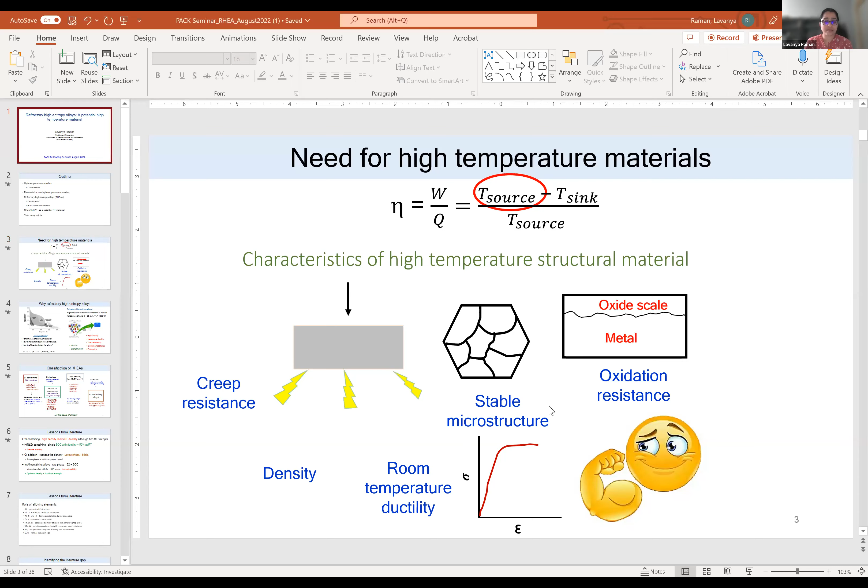Thank you. Yeah, sorry about that. Is someone else in the room with their audio on with you? No, I think now it's fine, right? Yeah. Yep, so it's good now. Yeah, so thank you so much for introducing me. So most of you know me, the work that I have done. So yeah, I'll start sharing my screen. I hope now the slides are in the presentation mode and it's visible.

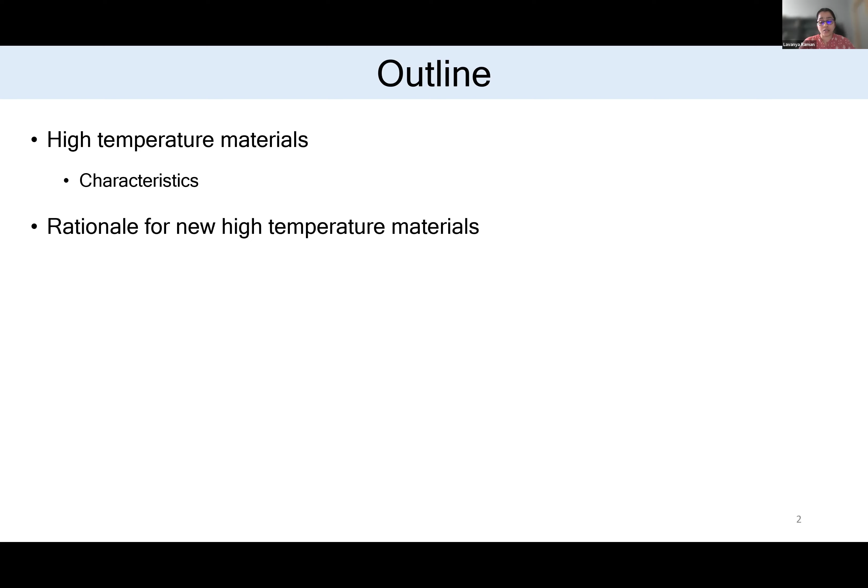Okay. Yeah, so good morning and thank you everyone for taking time to attend this talk. So the title of today's talk is refractory high entropy alloys, which can be a potential high temperature material. So the outline of the talk goes like this. I've planned what we mean by high temperature materials, what are their characteristics, why we need or how we can come up with new materials, why at all these refractory HEAs and how we can classify them, and what is the role of the alloying elements which will help us in developing a good refractory alloy which will meet the application requirements.

And finally, the main part will focus on the work which has been done extensively on this composition, which is chromium, molybdenum, niobium, titanium, tungsten in equiatomic proportion. We'll see how we made this alloy from different routes, stage by stage. What is the microstructure? Is it really thermally stable, and the deformation behavior? So finally, some learnings that we have from the work which has been done and how we can extend or go ahead.

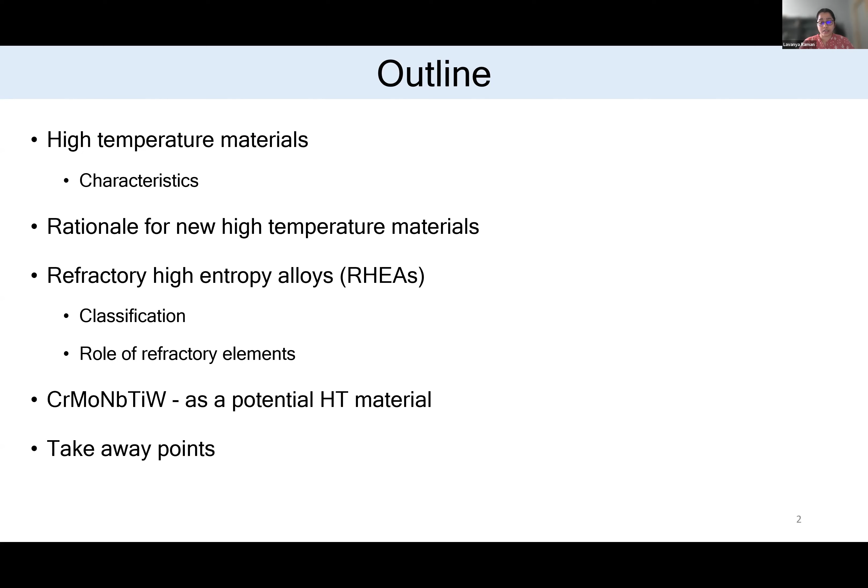So coming to the high temperature materials, all of us know that the efficiency of any working system can be improved when the material can operate at a higher temperature. So this is the famous equation. When the operating temperature of a material is higher, the efficiency can be increased. So when we say the material has to operate at very high temperature, it has to have a very high melting point and it should have certain characteristics. So we will see what will make a material qualified as a high temperature structural material.

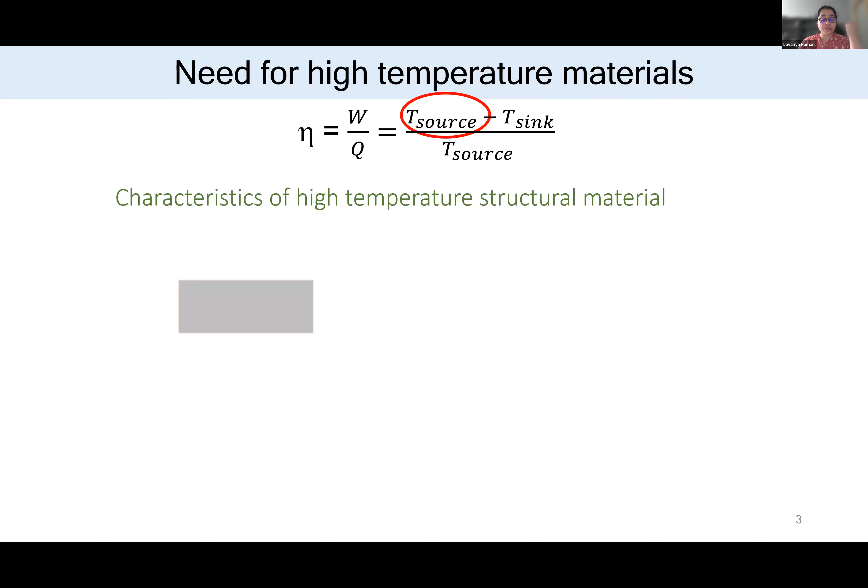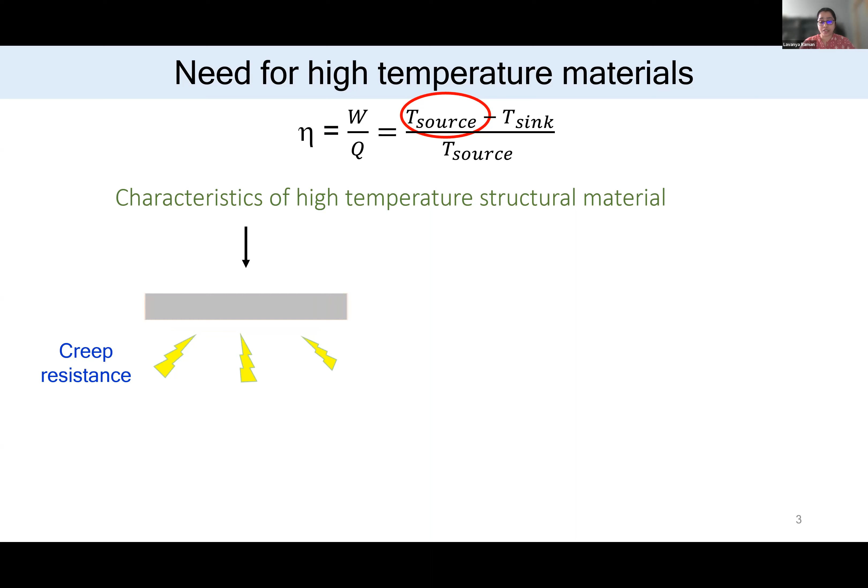So first and foremost, when you take any material or an alloy and heat it to a higher temperature and then apply load, it should have creep resistance. That is, it should not change its shape and size. So that is the foremost thing, it should have a very good creep resistance. And then comes a stable microstructure. So the grain size or the phases should be really stable. And then depending on the atmosphere in which the material will be used, it should have adequate oxidation and corrosion resistance.

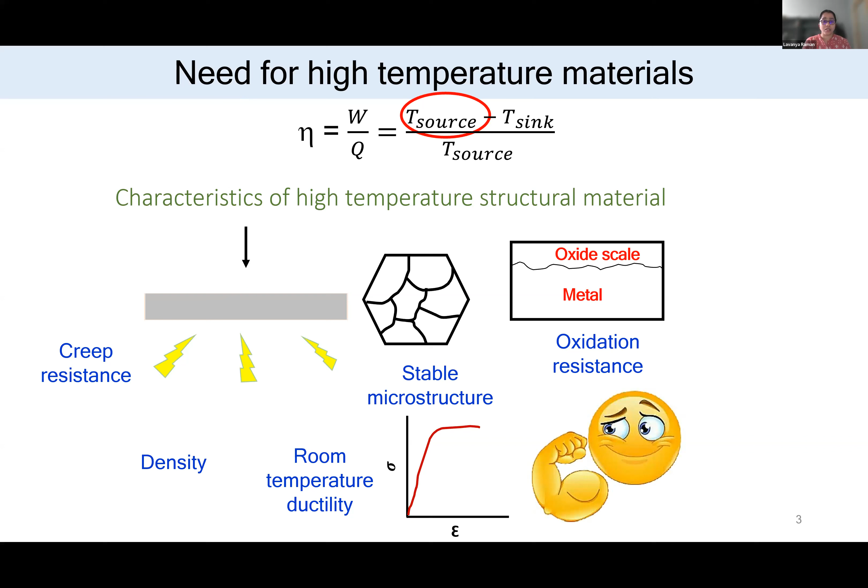Also, the material should not be so heavy. For structural application, if the material itself is heavy, it will be very difficult to handle. So it should have optimum density. Another important qualification is it should have adequate room temperature ductility so that we can avoid catastrophic failures. And then comes high temperature strength. Since we are designing a material for high temperature, we need strength which can be retained at those high temperatures. So keeping all these things in mind, we can now address why we need refractory HEAs.

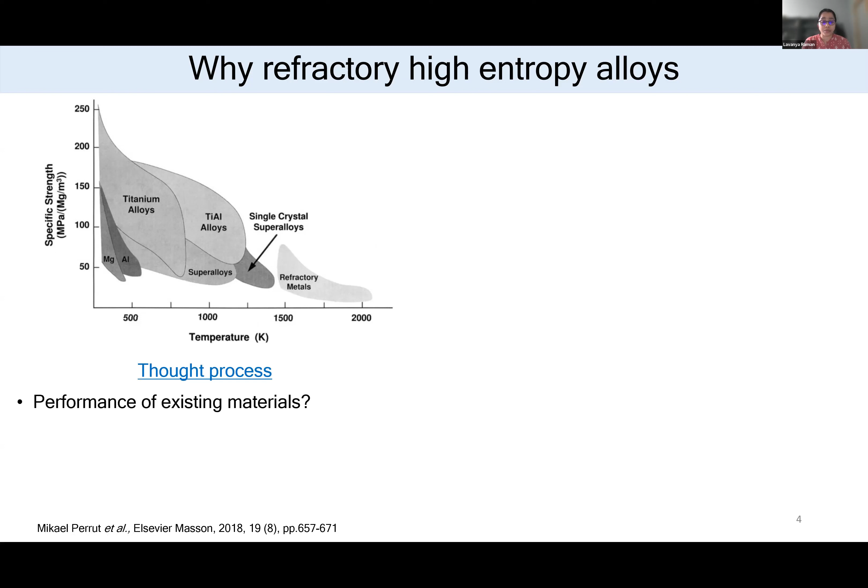So now when we look at this diagram, the questions that arise in our mind are how we can improve the performance of these existing materials, or what can be done, maybe fine tune, or have some composite or ODS addition so that you can improve its durability, strength, and performance, or how efficiently we can design these alloys.

So when we have these questions in our mind, we thought we'll go about how we can efficiently design these alloys. So the birth of HEAs happened in 2004, wherein people mixed different elements together. It can vary from 5 to 35 atomic percentage, so that you have a combination of elements so that the synergy of each element will give you a better performance.

So when we say refractory high entropy alloys, these elements are definitely refractory in nature, wherein their melting point is greater than 1500. So when we mix them together in desired proportions, we can make HEAs. One very unique property of these HEAs is they have very high melting point and they can retain their strength at high temperatures.

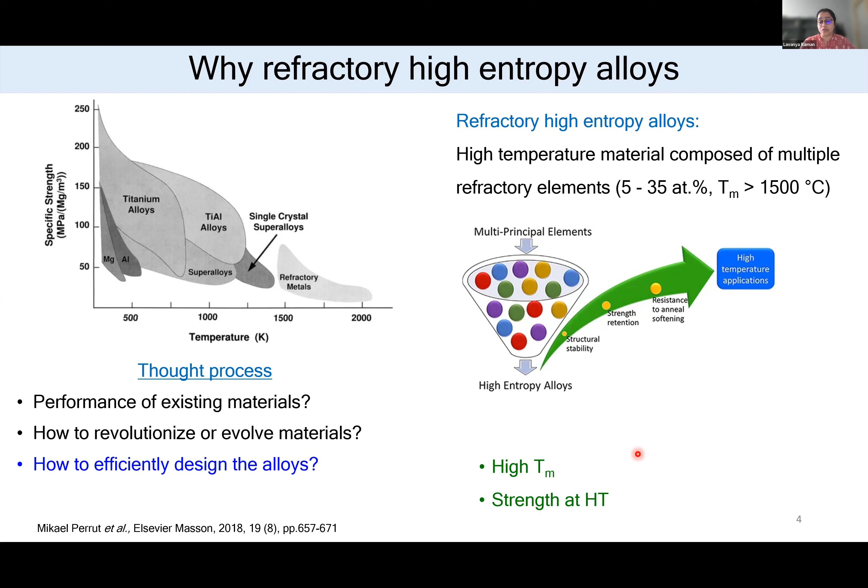However, they have very few applications because of the following points. They are highly dense, like tungsten is almost 19 grams per cc, and they don't have the optimum ductility at room temperature. Also, they can easily form volatile and porous oxides. And it's extensively difficult to make a high pure alloy or even metal. So these are the properties of these refractory HEAs.

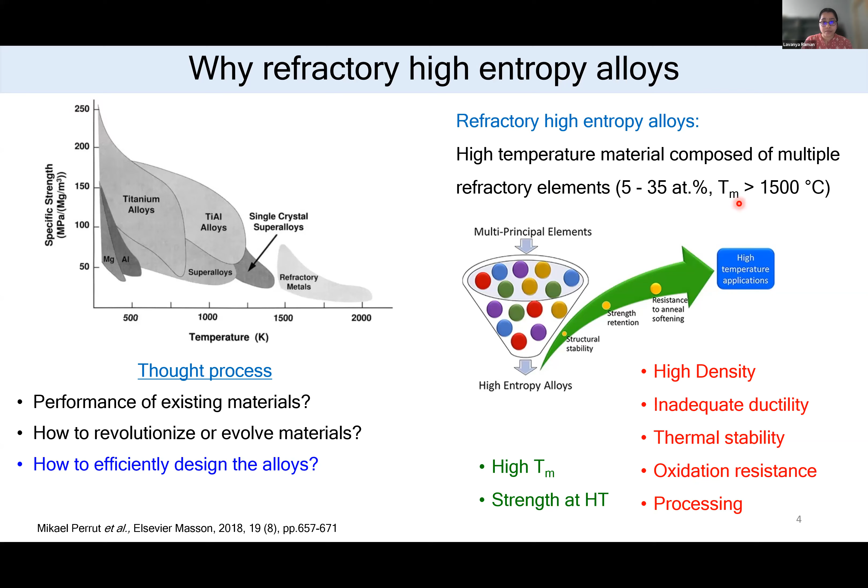So now in the refractory HEA community, there are so many alloys which have been developed so far. I have tried to classify these alloys based on the density so that it will be easier for us to identify the domain which we want. The first and foremost alloys developed in this field were tungsten containing, which was mainly moly, niobium, tantalum, tungsten, with some vanadium addition, and then there were some modifications.

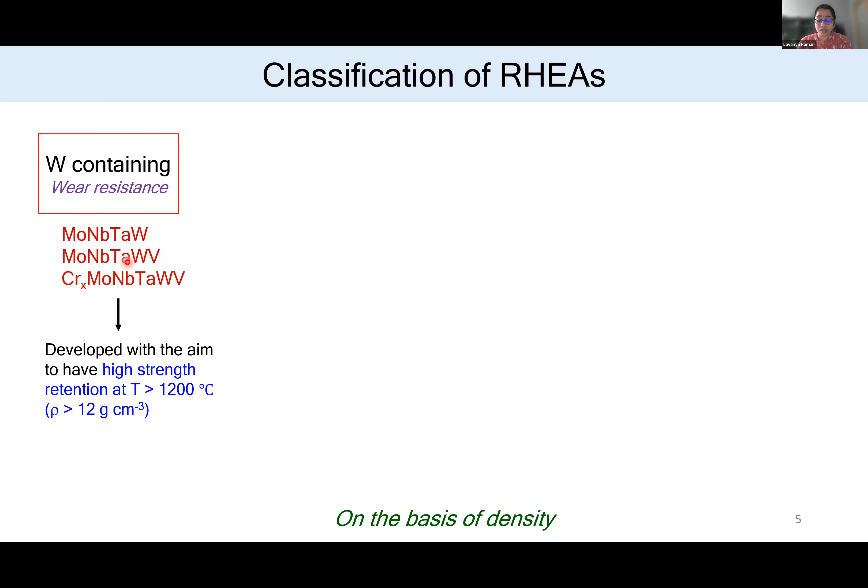The main intention of this study was to make alloys which can retain the strength at temperatures above 1200. In the study, they showed it can retain the strength up to 1500. But the major drawback is they are highly dense. And then they modified the composition, wherein they added hafnium, niobium, and zirconium. This was mainly developed to have a combination of strength and ductility, and they were found to have a single phase, which was really good.

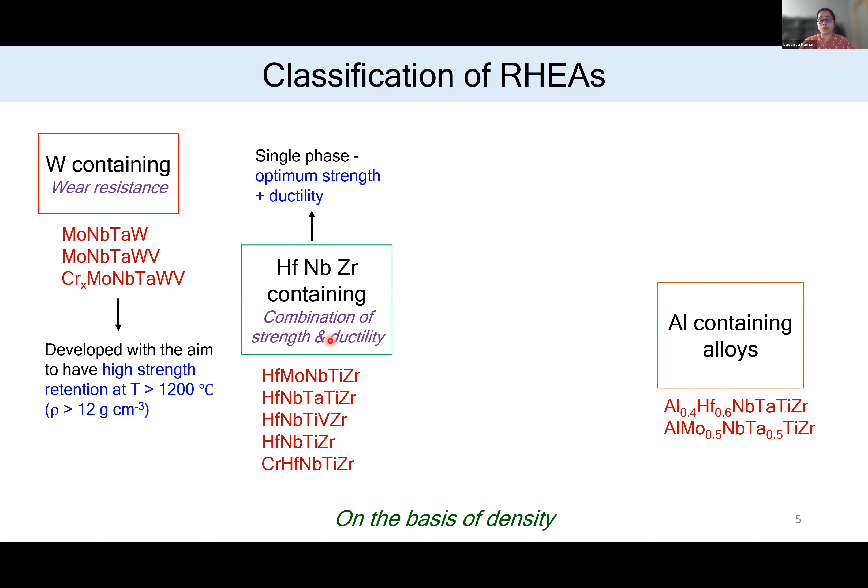And moving ahead, people tried to add aluminum to the refractory alloys, although we know aluminum doesn't have that high melting point. The main intention to add aluminum was to reduce the density and to have better oxidation resistance. These aluminum containing alloys had a B2/BCC microstructure, which is similar to the superalloys, a basket weave microstructure. They showed optimum density, strength, and ductility, so this was a really good way of making alloys which satisfies most of the criteria.

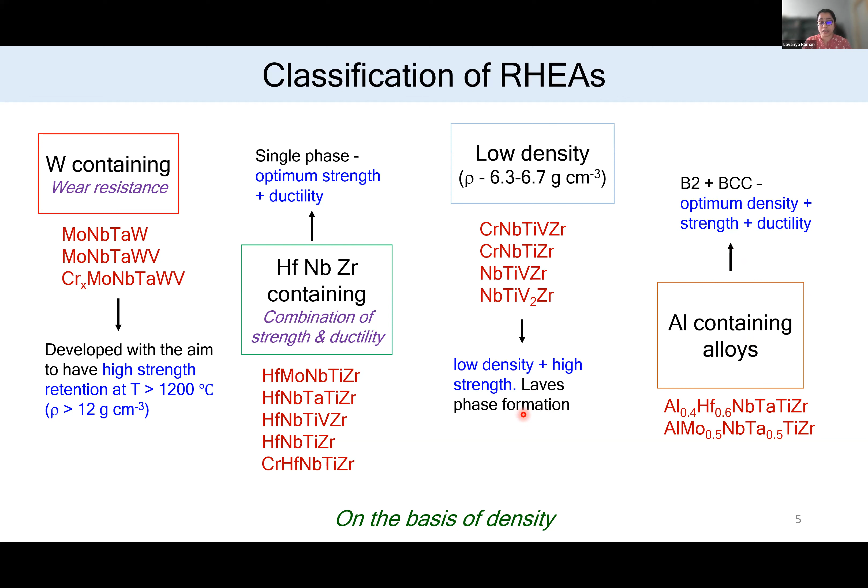And finally, to further reduce the density of the alloy, people added chromium, titanium, and vanadium. When the addition of chromium and vanadium happened, it led to the formation of Laves phase. Although it increased the strength, there was a drawback in terms of the ductility. These alloys were very brittle.

So now I have summarized what lessons we can learn from this HEA field. Tungsten containing alloys are highly dense and lack room temperature ductility, but the good point is they have high temperature strength retention. The second class of alloys have adequate room temperature ductility, but the major drawback is the thermal stability. They tend to form precipitates or some intermetallic phase upon long heat treatments.

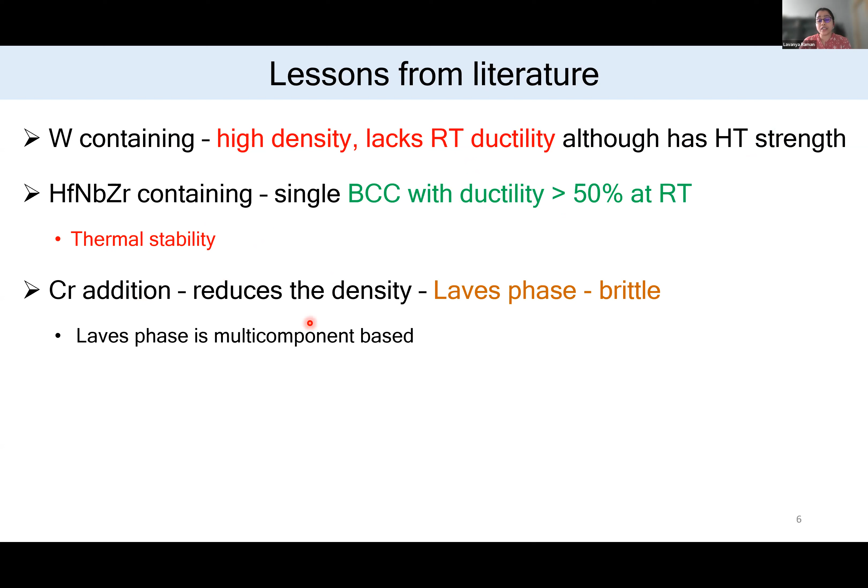And finally, when we added chromium or vanadium, they reduced the density, but the formation of Laves phase made the alloy very brittle. And in case of aluminum containing alloys, we have a good combination of density, ductility, and strength, but the major drawback is thermal stability.

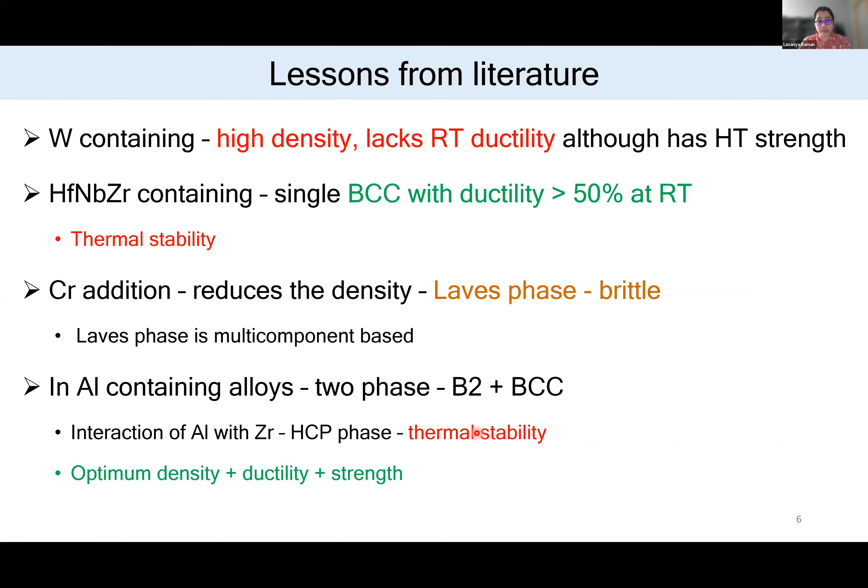Also, I've tried to summarize how we can choose elements depending on the role of each alloying element. As we can see, aluminum can give better oxidation resistance, or it can promote B2 structure, basically a BCC phase, but in this case it results in an ordered BCC phase. When we have chromium and vanadium, we can expect Laves phase to form when they combine with elements like niobium and titanium.

And these elements, hafnium, zirconium, and titanium, are HCP at room temperature. When we have these elements, they tend to give adequate ductility at room temperature. Mainly moly and tungsten we need when we are aiming for temperatures above 1300. They help in retaining the strength, and they have very good wear resistance.

So finally, when we need to have an alloy with adequate ductility and toughness, we'll have to add elements like niobium and tantalum. Some studies have shown that addition of vanadium and titanium helps in refining the grain size. So these are the things which we can get from the literature. Now we'll have to design an alloy which will have an optimum combination of everything in terms of density, ductility, strength, and thermal stability.

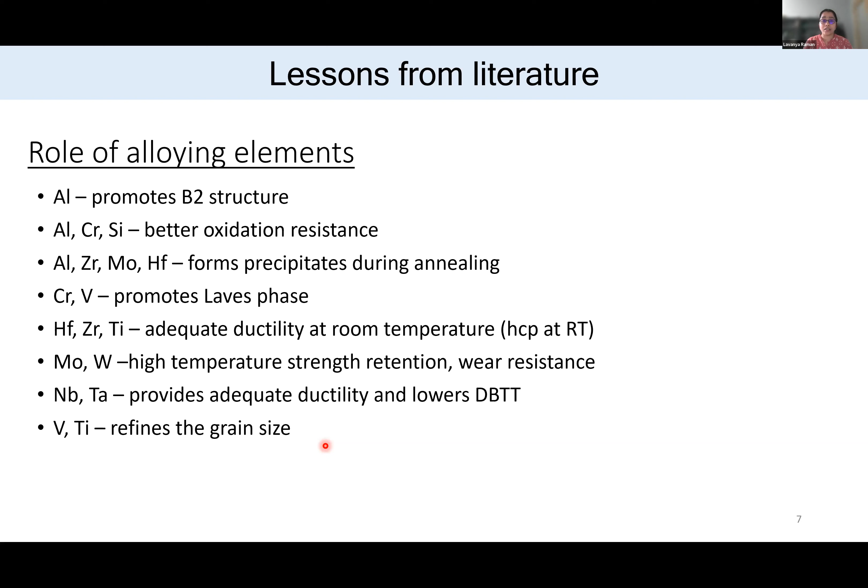This has mostly different refractory HEAs. Also, they have shown superalloys like Inconel, Haynes, and MAR-M. If we look closely at first glance, one may think that these superalloys drastically reduce their strength as we go to temperatures above 1000. Whereas these refractory alloys show a kind of a steady state region where the strength is retained.

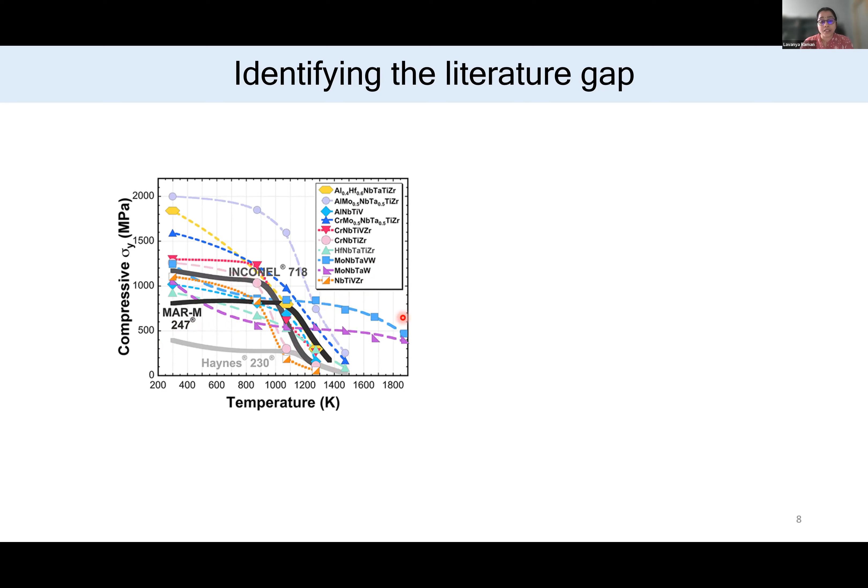But when we look closely, in both the cases, the strength drop happens at around 0.6 of Tm. The only advantage what we have in these refractory alloys is their melting temperature is very high. Because of that, we will have access to those high temperature domains which we cannot achieve using these superalloys. So only because of the melting point of these refractory HEAs, we can go to temperatures above, let's say, 1300 Kelvin.

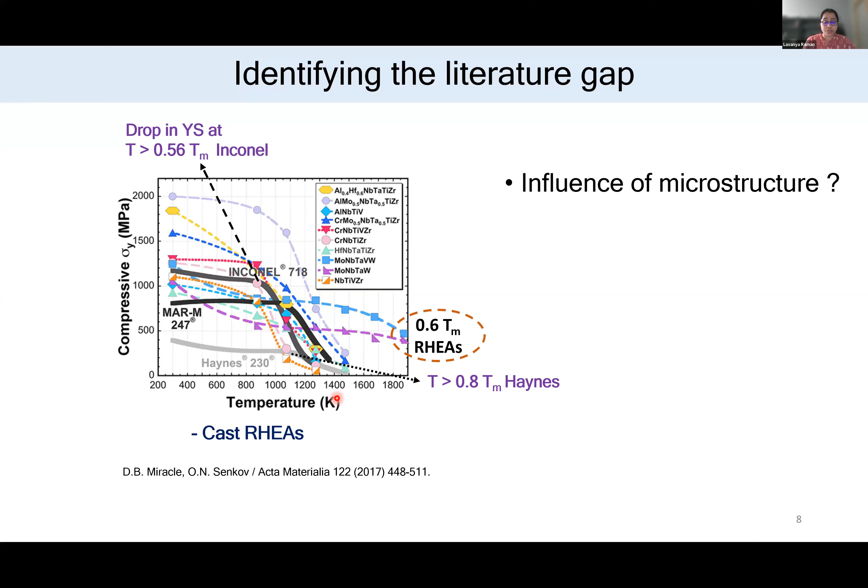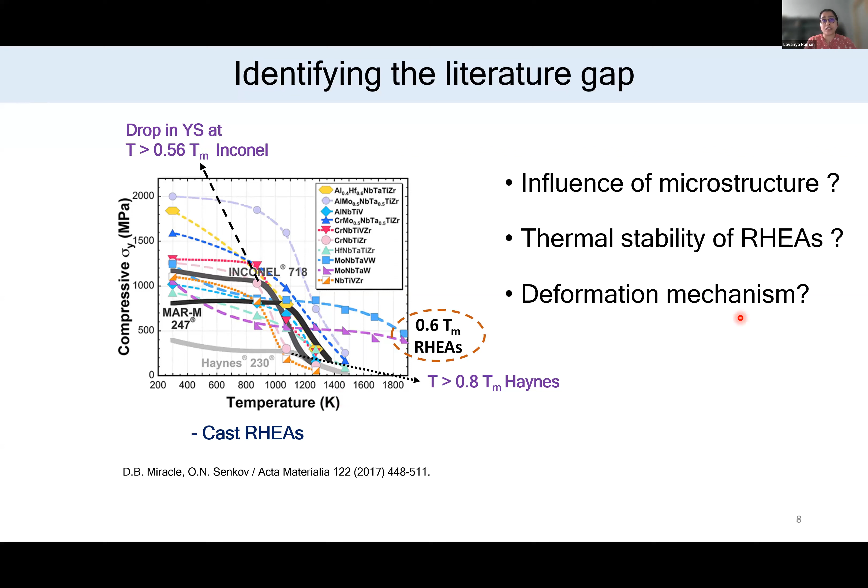Another important thing is in the literature, most of the studies has been done on cast HEAs. So we don't know how these alloys will behave if we make them through powder metallurgy route or any other metastable synthesis route. How those microstructures will be, how the different processing routes can affect the microstructure, and will they really be thermally stable, and what are its deformation mechanisms. So these are the three things which we have tried to focus in our work, and this is where the literature also lacks more study.

So for addressing those questions, we have chosen this composition, which is chrome, moly, niobium, titanium, and tungsten. The rationale for choosing this composition can be understood from this figure. This figure shows a work which is done by Christopher Schuh's group for binary tungsten alloys, wherein they have showed that these nanocrystalline binary tungsten alloys can be really stable at around say 1100 degrees, depending on the choice of second element.

The region here in green contains elements like chromium and titanium, majorly which are close to the boundary. So what happens is that when we add elements from this stable region, they tend to segregate at the grain boundary, making the grain boundary stable. So it pins the grain boundary so that it cannot grow even at such high temperatures.

From this, we have chosen chromium and titanium. We just want to see when we extend from the binary to a multi-component system, whether this idea will be applicable or not. So that was the reason why we chose chromium and titanium, just to stabilize the nanocrystallinity of the alloy.

And from the previous slides, from our learnings from literature, we have chosen niobium, which we need to have sufficient ductility, and also moly and tungsten, which we need for high temperature strength. So this is why we came up with this composition.

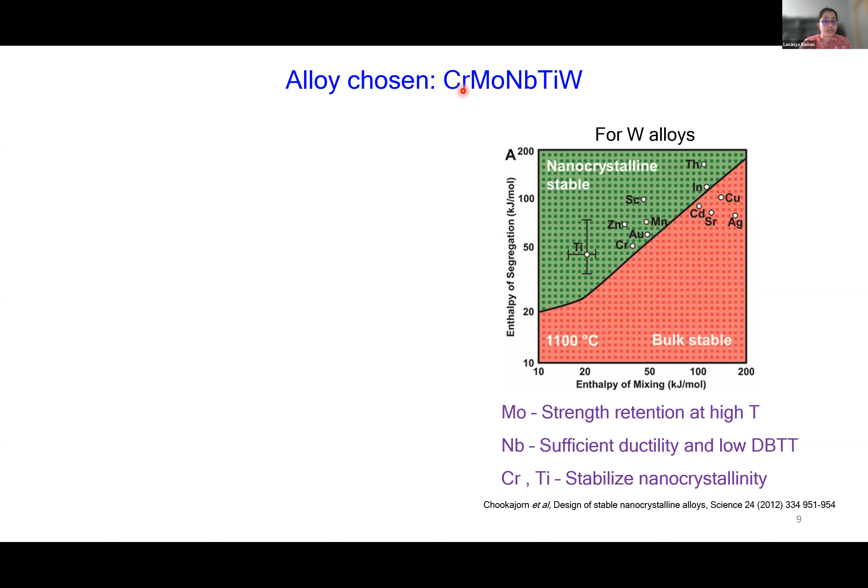And this alloy we have tried to make through two different routes. One is vacuum arc melting, the conventional one, so that we can compare with the literature. Another non-equilibrium synthesis route is powder metallurgy, wherein we use mechanical alloying. In that we try to synthesize the alloy using wet milling condition. When I say wet milling, we use a process control agent, toluene, so that the powders are immersed in that when we make the alloy.

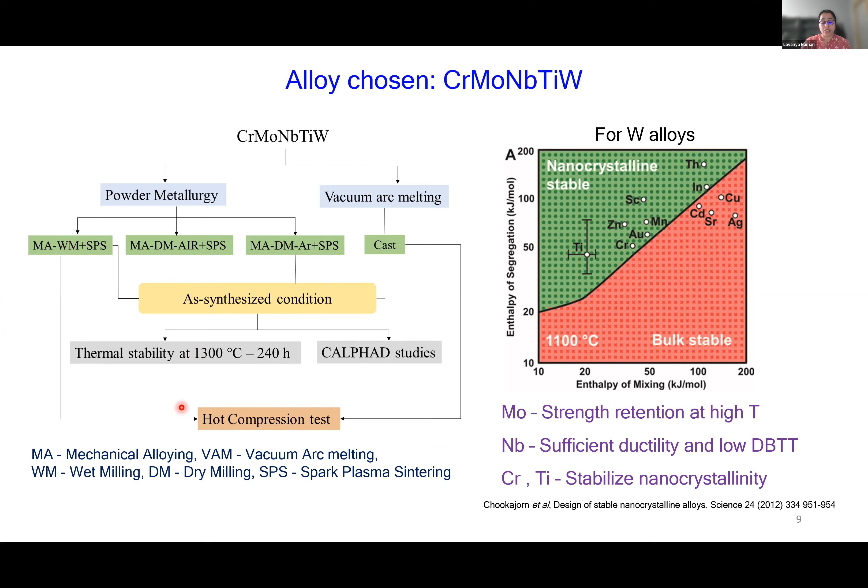And in dry milling, we don't use any PCA. In the dry milling, we varied the atmosphere in which we make these powders. One was done in air, and another was done in an inert argon atmosphere. We have tried to characterize the alloys in their as-synthesized condition, and the experimentally observed phase formation was validated through the CALPHAD studies, and we also saw the thermal stability. Finally, the deformation behavior of the cast alloy and the wet milled alloy has been studied. I'll be showing these things in detail.

So to start with, for the mechanically alloyed wet milled condition, we used Fritsch high energy ball mill, where these individual elemental powders were added in equiatomic proportion.

So the ball milling was done at 300 RPM with toluene as the PCA in tungsten carbide vials. So once we have the powders...

When we characterized them using XRD, it showed the formation of 2 BCC and some residual elements. We also tried to estimate if we have any contamination from the toluene or the milling media, and we found we have this much amount of carbon.

When we tried the EBSD to get the grain size, all these 3 BCC phases are indexed as 1 BCC. And we tried to validate the experimentally observed phase formation using CALPHAD.

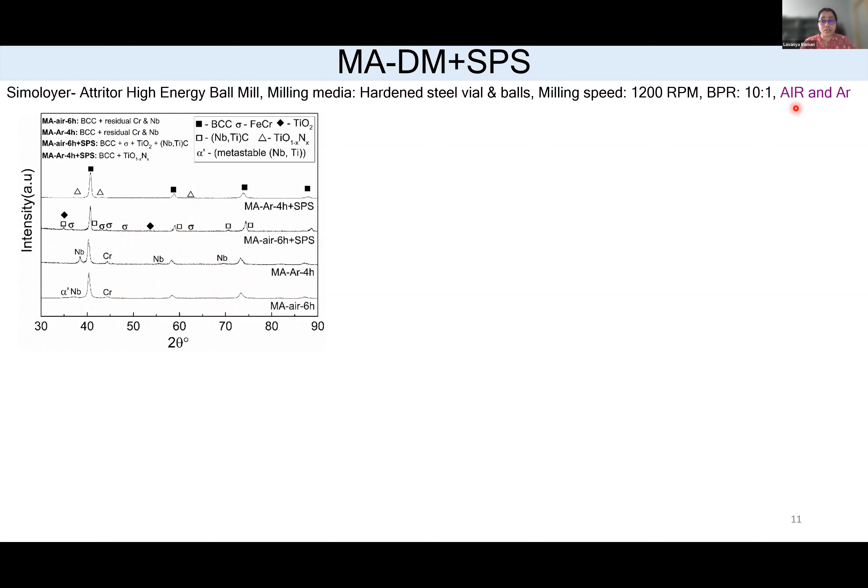As I mentioned, the milling media here is hardened steel vials and balls, so from this milling media we had some amount of iron contamination. The residual chromium reacted with this iron, which has very strong affinity, and it formed a sigma phase, which is an intermetallic phase. Whereas the niobium combined with titanium and formed a secondary carbide.

Since we carried this out in the air atmosphere, as we know, among these elements titanium has more affinity for oxygen, and it formed TiO2. So basically, we have a BCC major phase with sigma, titanium oxide, and a multi-carbide as the secondary phase.

Now, when we carried out the synthesis in argon atmosphere, we have different kinds of phase formation. These residual elements combined together to form a Cr2Nb Laves phase.

We may wonder why in this case chromium couldn't react with iron to form a sigma phase. That's because when we did it in argon atmosphere, we reduced the milling time, and it had only about half the iron contamination, which was not sufficient enough to form a sigma phase.

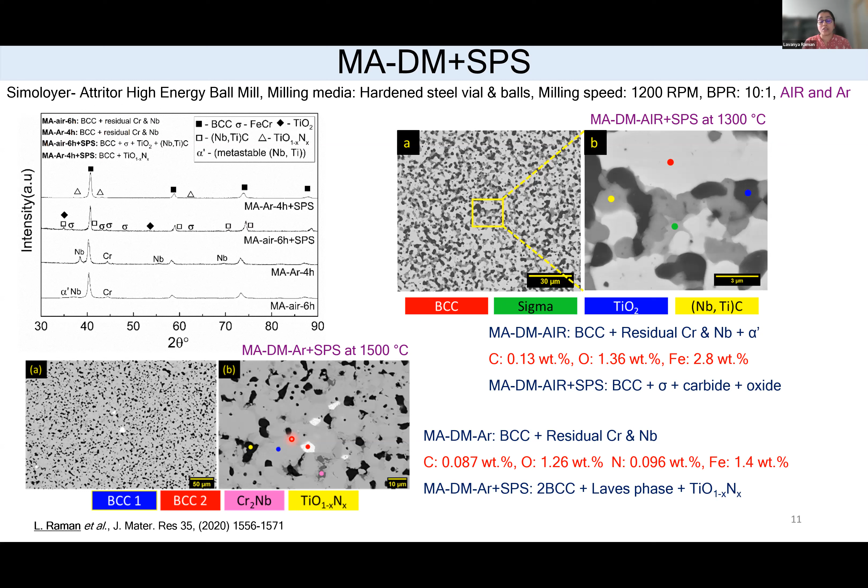When the same composition was made using arc melting, we obtained a single phase BCC. This is the SEM microstructure, where we can see that elements segregate into the dendritic and interdendritic regions according to their melting point.

Tungsten has the highest melting point, so that goes into the dendrites. Then moly and niobium go to the interdendritic region, and the last to solidify are chromium and titanium. So the single phase nature of this alloy is confirmed using EBSD.

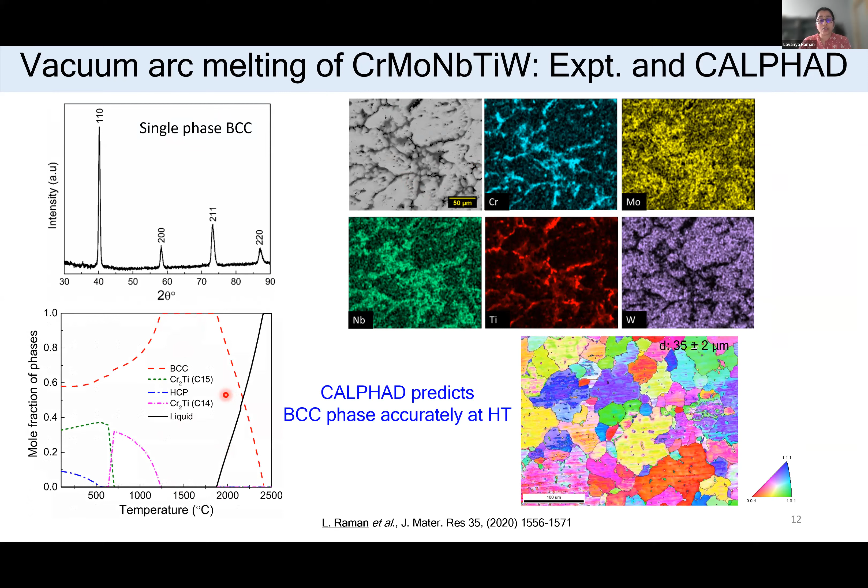When we did the CALPHAD studies, this also shows that at high temperature, we have only a single phase BCC. So now to summarize the phase formation and microstructural variation of this composition when we make it through different alloys.

We can see that the casting route gives a single phase BCC, whereas the powder metallurgy route, depending on either wet milling or dry milling, and also the milling atmosphere and media, gives different secondary phases. So one thing we learn is that the extent of alloying which happens in the powder metallurgy route decides your secondary phase, and the way in which you make these alloys, like the milling atmosphere and milling media, helps you identify what secondary phase you can have.

So the table here shows some studies apart from this work from the literature, wherein people have reported similar phase formation for this composition.

So now that we have made this alloy, we have to really establish whether these alloys are thermally stable before we can actually study its properties.

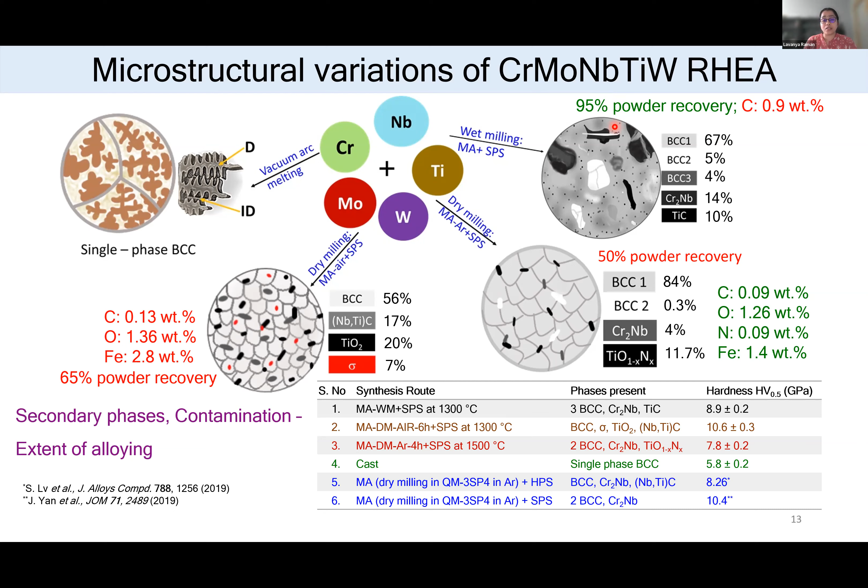When we say thermal stability, we have to make sure that the alloys have proper grain growth resistance. So for that, we try to calculate this growth factor, which is nothing but the ratio of final grain size upon initial grain size.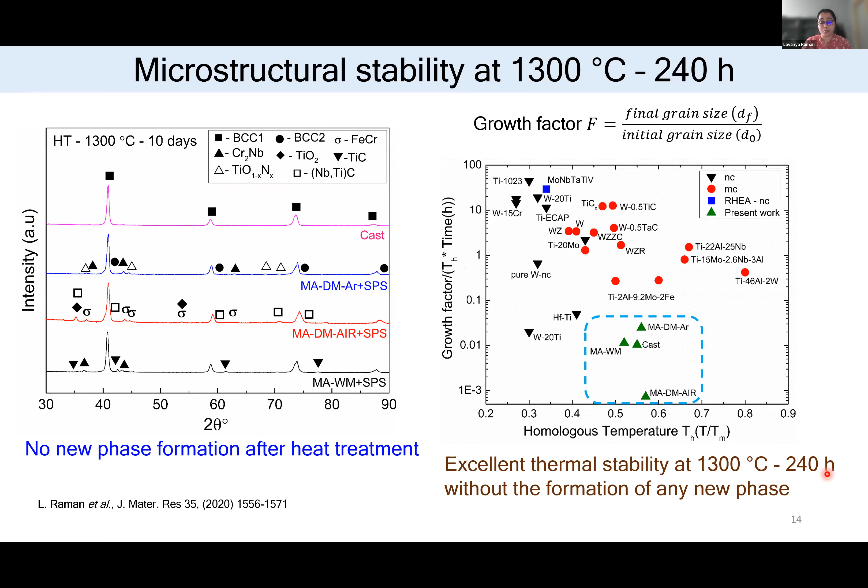So now we know that this alloy has different kinds of phases and is really stable. So now we have to understand the deformation mechanism of this alloy. For that, for the mechanically alloyed composition, we did compression studies using Gleeble, which is a thermomechanical simulator.

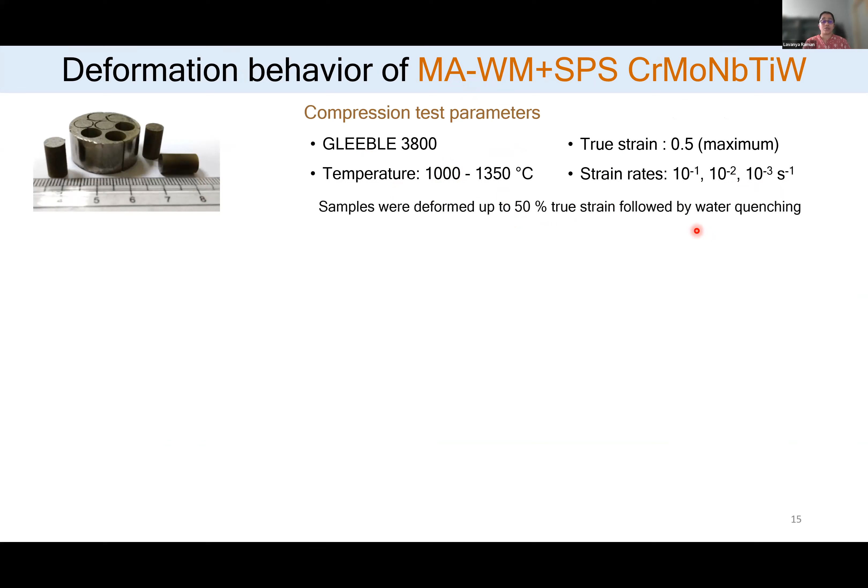This means that initially, up to a certain strain, the alloy work hardened, so we have to apply more and more force to deform it. Whereas once you cross a certain barrier, it becomes easy to deform the alloy. Whereas when we do it at a very slow strain rate, the material has enough time to rearrange the dislocations inside it, and it exhibits a steady state behavior.

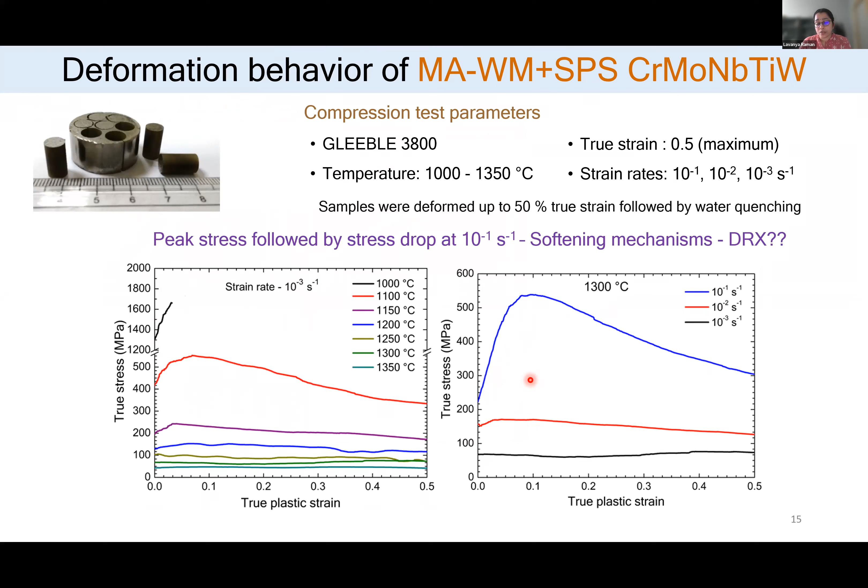So generally, if we do that at 1% strain, we have a stress exponent of 3 and an activation energy of something close to 500. But here we have seen that the material is very sensitive to the way we deform, whether it is in a fast or slow way. So the material is very sensitive to the strain rates.

So what we tried to do was calculate these parameters as a function of strain and strain rate. We can see that the stress exponent varies with increase in plastic strain—it decreases up to a certain level and then increases. Whereas the activation energy in low strain rate conditions is almost stable, but at higher strain rate conditions, it goes to a peak and then decreases. So this clearly tells us that the flow stress is a strong function of deformation temperature, strain rate, and strain.

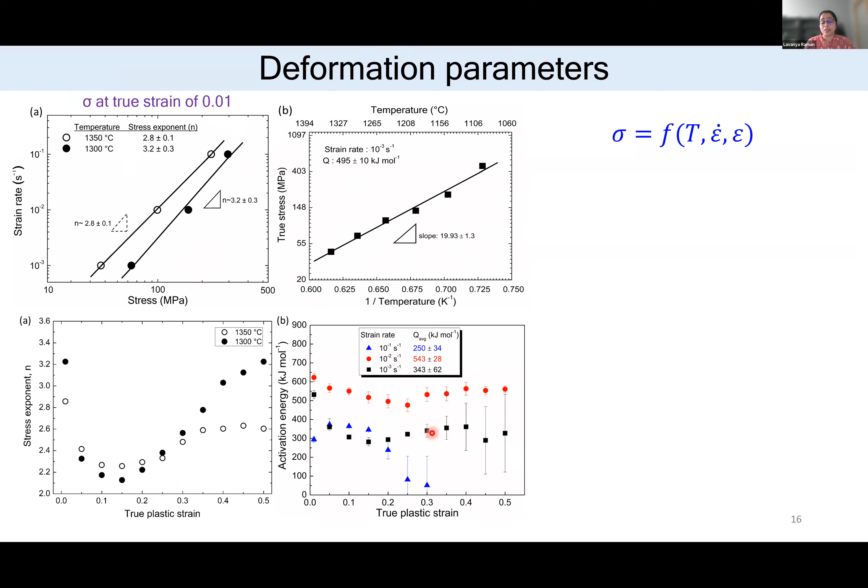This is a classic behavior of any BCC alloy. But the important thing to note is that how these parameters vary cannot be understood from the stress strain graphs itself. So it may not be correct for us to establish these parameters if we follow the conventional way. We'll have to examine the deformed microstructure at each stage to understand what exactly is happening. So overall, from the stress exponent of 3, we can say that some dislocation based activity is the deformation mechanism happening in this alloy, but we'll have to confirm that only when we examine the deformed microstructure.

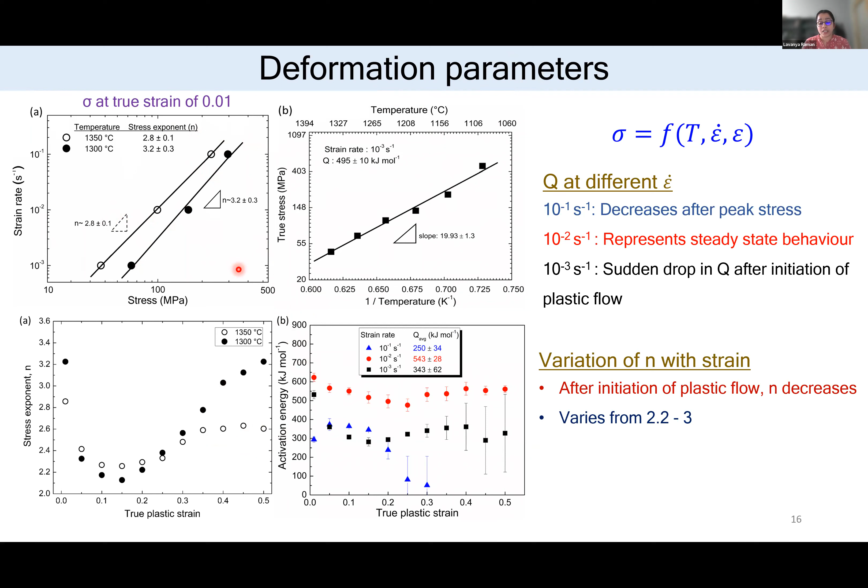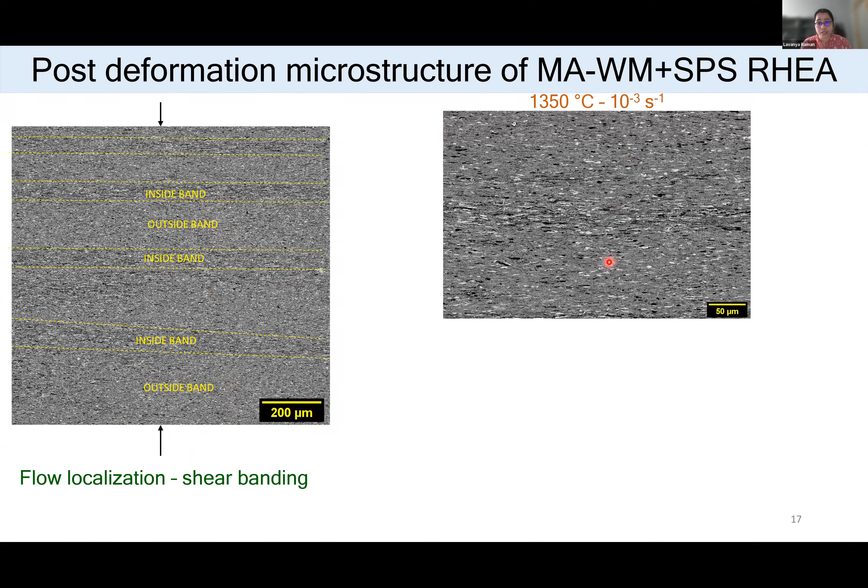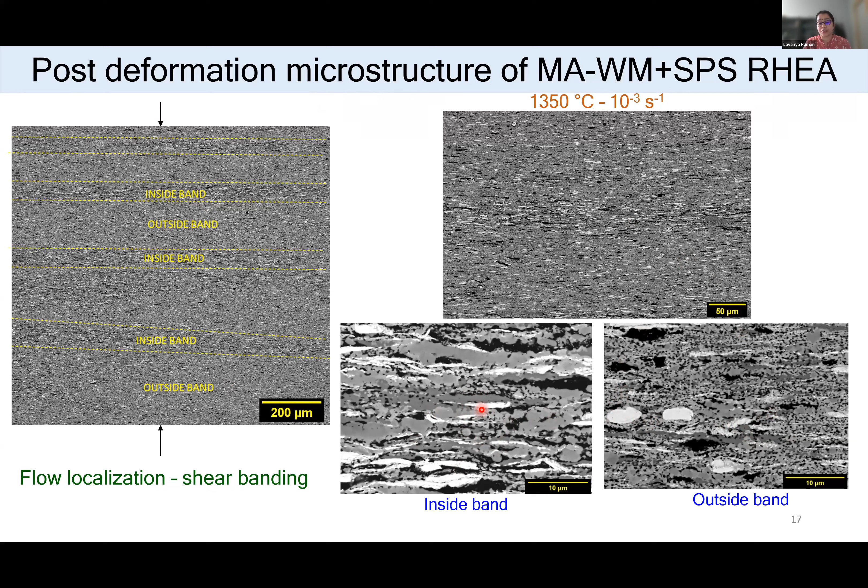When we look into these bands closely, I've shown the SEM microstructures here separately for the inside band and the outside band region. We can say that all the phases have deformed, but the extent of deformation of these phases is more in the inside band region. So these bands take up more of the strain compared to the other region.

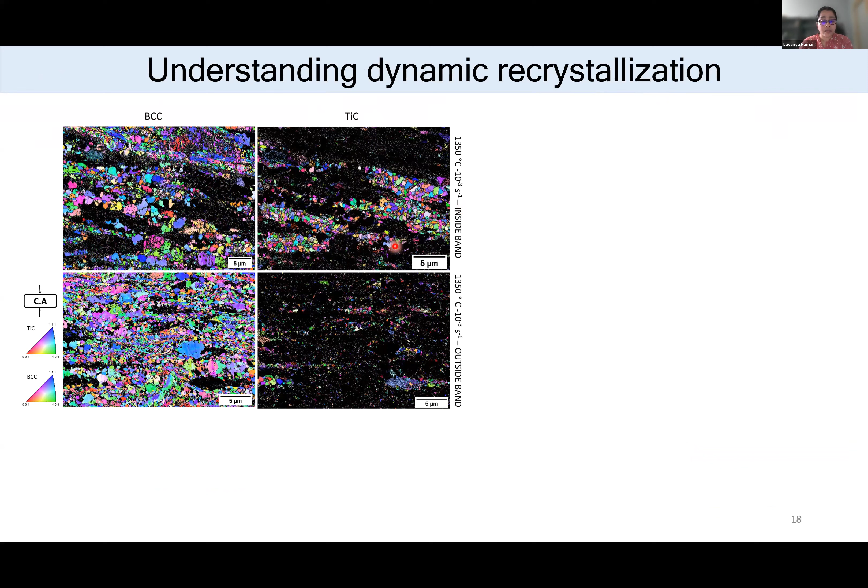So now to understand this dynamic recrystallization or the softening mechanism, we did EBSD analysis. We tried to index the BCC and titanium carbide phase. Using the grain orientation spread, we can calculate what is the recrystallized fraction. As we can see, the recrystallized fraction of the BCC phase increases with increasing strain rate and decreases with temperature. So from this EBSD pattern, it is clear that at the interface of BCC and titanium carbide, we have very fine recrystallized grains.

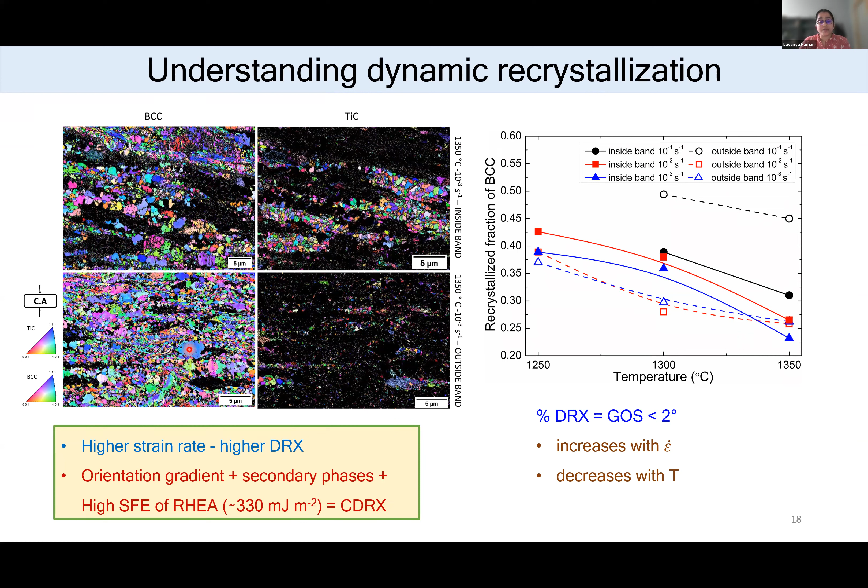And also when we combine this GOS analysis with the secondary phases that we have, and also with the high stacking fault energy of this HEA, we can confirm that what's happening in this alloy is like a continuous dynamic recrystallization. So that is one thing we'll have to understand—it's not like a conventional, discontinuous dynamic recrystallization. The presence of secondary phase and the orientation gradient within each BCC grain results in this CDRX.

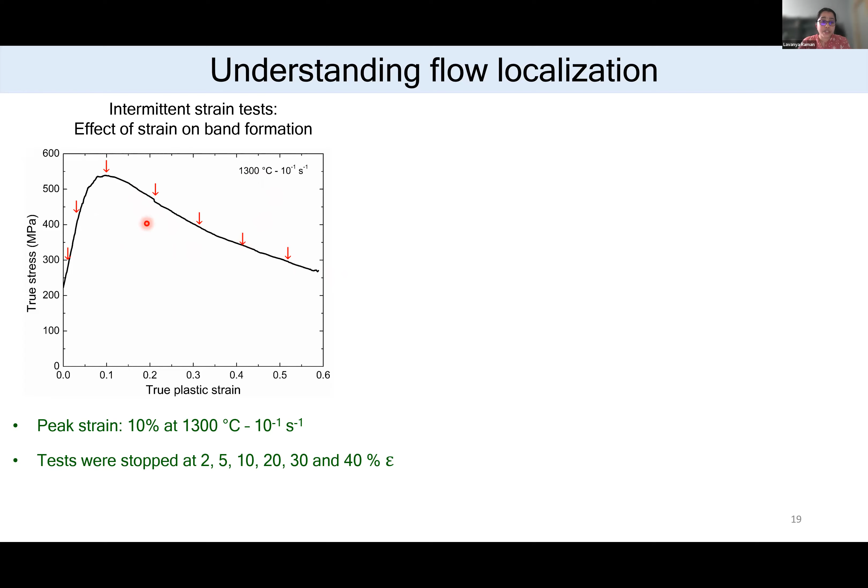So now to understand the flow localization, we did some intermittent strain tests. That is, we stopped the test at a particular strain and then quenched the sample to check the microstructure. We conducted tests at different strain levels like that. When we checked these microstructures, we were able to identify the flow localization only at 30% plastic strain, which means the flow localization happens somewhere between 0.2 to 0.3 strain.

In the literature, people have shown that usually this flow localization or shear banding happens beyond 25% strain. And also what we observed from the dynamic recrystallization study is that DRX occurs at strains way ahead of this flow localization, which means DRX happens first, followed by flow localization. So it is DRX that is causing the flow localization in this alloy system.

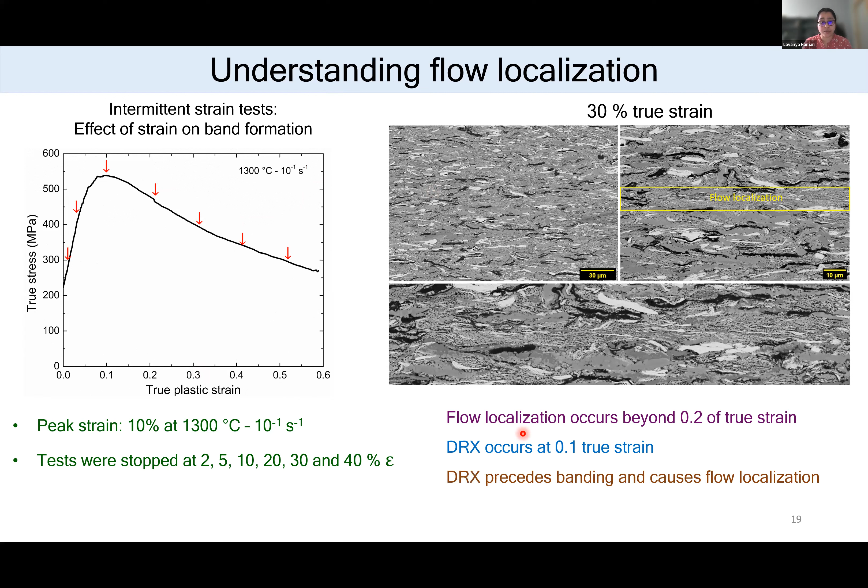So now to confirm the deformation mechanism, we did some TEM analysis where we could see that inside the BCC grain, we have glide of ⟨11̄1⟩ dislocations, which confirms dislocation glide to be the active mechanism in the mechanically alloyed and sintered HEAs.

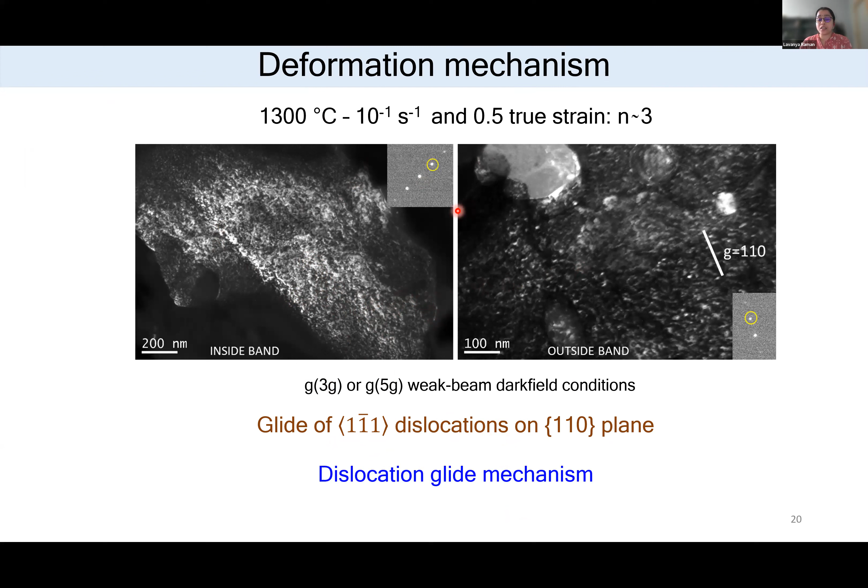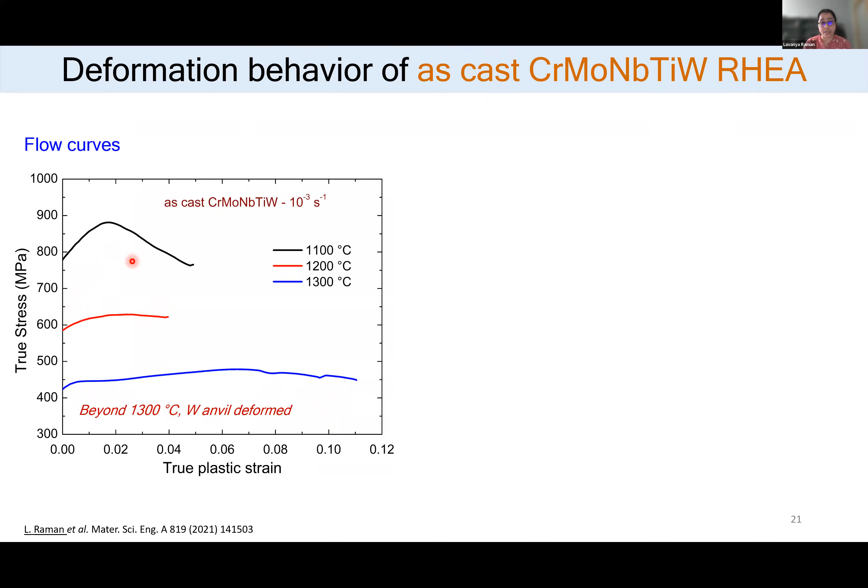So now coming to the cast HEA, the flow curve of the cast HEA at low strain rate is shown in this figure, where we can see that they have very high strength compared to our mechanically alloyed counterpart. And the deformed microstructure of the alloy at 1200 is something like this, where we can see the precipitation of this Laves phase in the interdendritic regions. This Laves phase was confirmed to be Cr, Nb and titanium rich through the elemental mapping analysis.

So the as-cast alloy in the as-synthesized condition had only a single phase BCC. Now after deformation, we have the formation of the Laves phase.

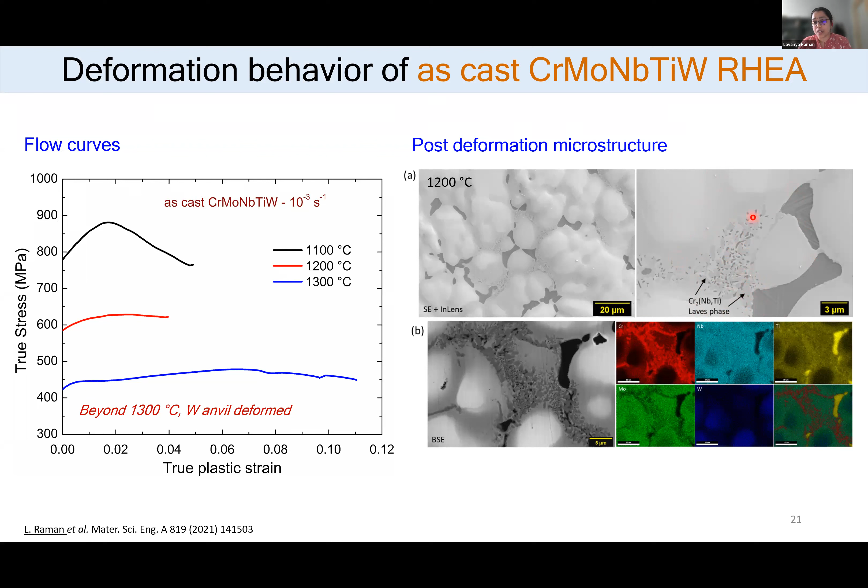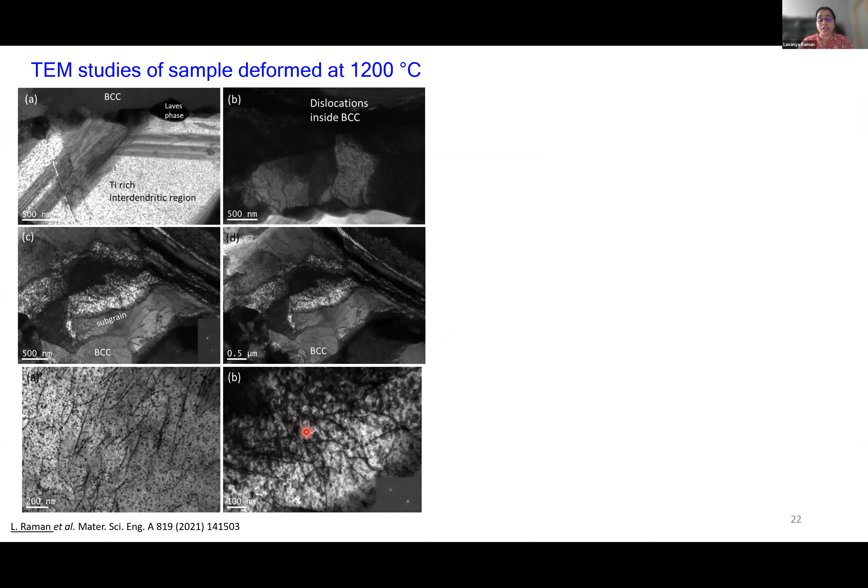From this dislocation imaging, we try to understand what is the strength contribution coming from the dislocations. If we go by this equation, sigma y gives us the overall yield strength, and the contribution from different sources can be the solid solution strengthening, which can come from a single phase BCC, the grain size strengthening depending on the grain size of the alloy, the precipitation strengthening, which can be from this Laves phase, and the dislocation strengthening from the dislocations observed in the BCC phase.

When we try to quantify the individual contributions, we can see that when we add up the grain size, precipitation, and the dislocation strengthening, it comes to only about 200 MPa. But the experimental yield strength at this 1200 degree deformed condition was about 600 MPa. This clearly shows us that the dominant contribution comes from the solid solution strengthening, which means for the cast alloy, solid solution strengthening is what is resulting in the high strength.

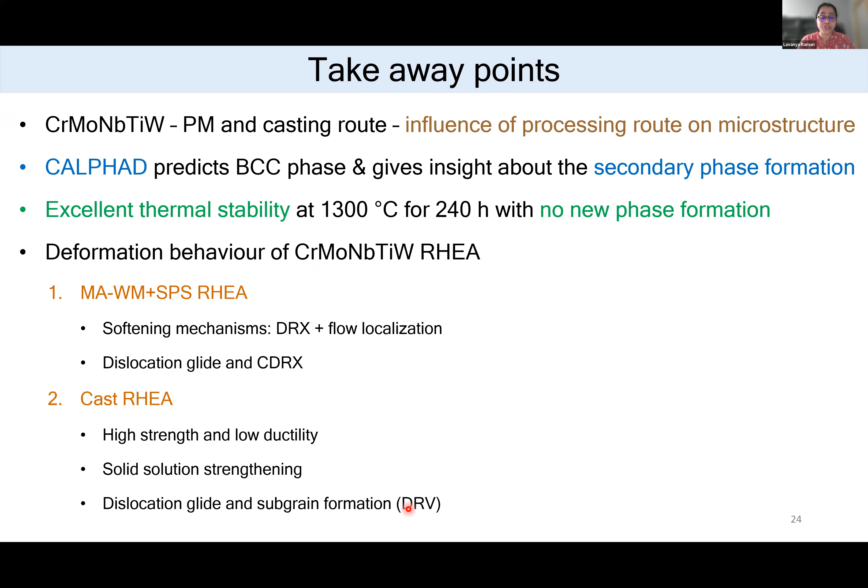So far this is what we have done majorly on one composition. Current work focuses on using machine learning to design these alloys, wherein we give all the information from literature to the database, and we use certain models to design alloys depending on the application, that is, what should be your yield strength or creep resistance, depending on that data.

The deep learning and CALPHAD high throughput calculations will give us these compositions, which will be made using vacuum arc melting or a fast process, and then the properties will be studied. This is a way we can use computation or simulations to reduce the amount of experiments that has to be done, which is a really good initiative so that we can come up with new compositions depending on their requirements.

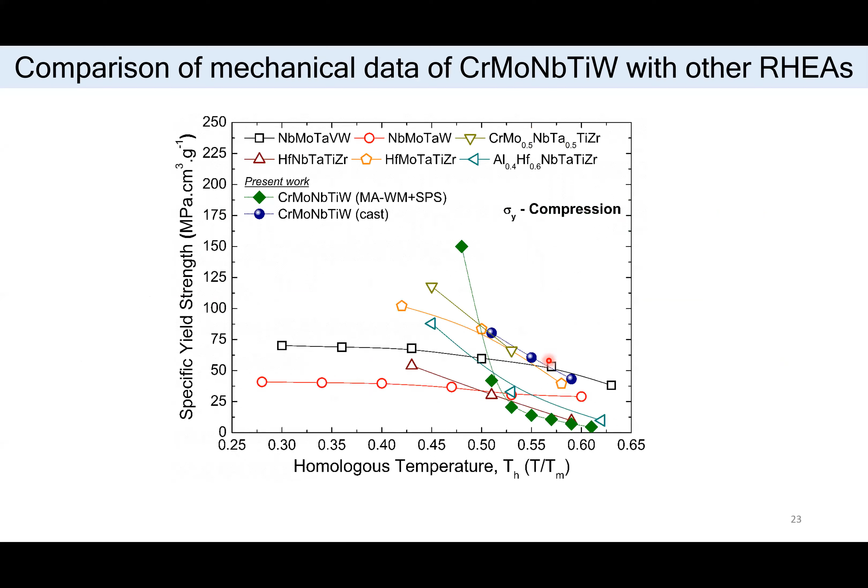I have one question towards the last slide, the strengthening contribution that you shared. So this one? Yeah, the one here. Did you calculate the dislocation density to find the dislocation strengthening contribution? Yes.

Did you do that from the TEM, or from EBSD, or some XRD experiment? No, from the TEM. These are the two images I showed, but I had to take multiple images where there are more dislocations, so you can calculate the dislocation length in a given area and calculate the dislocation density. So you had to take into account the film thickness, the TEM lamella thickness. Yeah, lamella thickness. Yeah, okay.

And Lavanya, you got really quiet. I'm sorry, your volume got really quiet. Just a second. Yeah, could you repeat that once more? I could not hear properly.

Okay, I'm sorry for that.

So basically, from the TEM images shown in the last two figures, I was able to calculate the dislocation length, the number of dislocations in a given area. So from multiple images, I calculated the dislocation density, and using this formula we can get the strength from the dislocations. So how about if the dislocations are really tangled, like in the right-hand side images, the length? How do you estimate that?

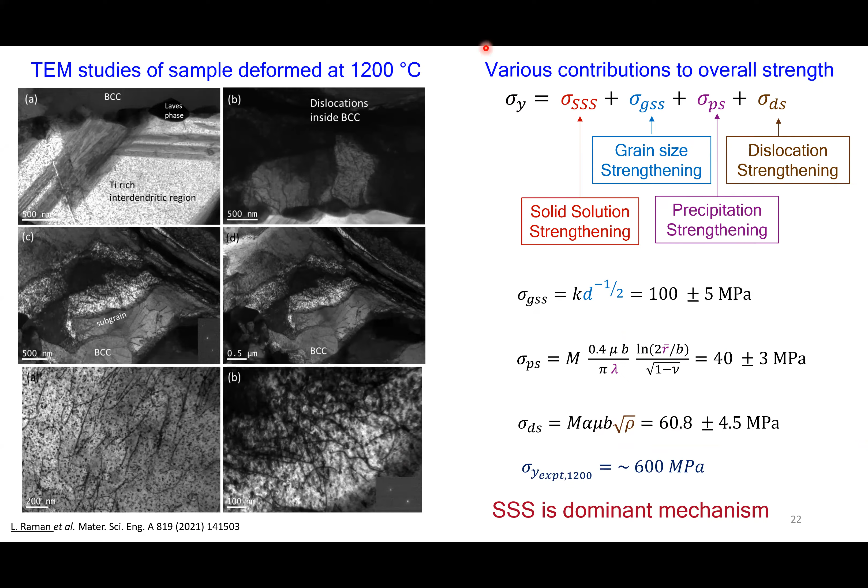Yeah, just a second, I'll see if I can share that screen. So what we do is that the solid solution strengthening of this alloy is basically a variation of temperature and these parameters. So we cannot really quantify it or have one model.

As you can see in this figure, we tried to estimate, only for the solid solution, how the dislocation interacts with the BCC lattice. As you can see, there is a wide range, so we cannot really say exactly how much comes from the solid solution. From the equation, we understand that more than 50% is the contribution from solid solution strengthening.

But depending on your Poisson's ratio and shear modulus, it varies over a very wide range, because for these alloys it is very difficult to estimate the experimental Poisson's ratio and shear modulus. So in our study we used the shear modulus and Poisson's ratio from different sources, basically from established databases or the Materials Project, and we tried to estimate the Poisson's ratio from synchrotron studies.

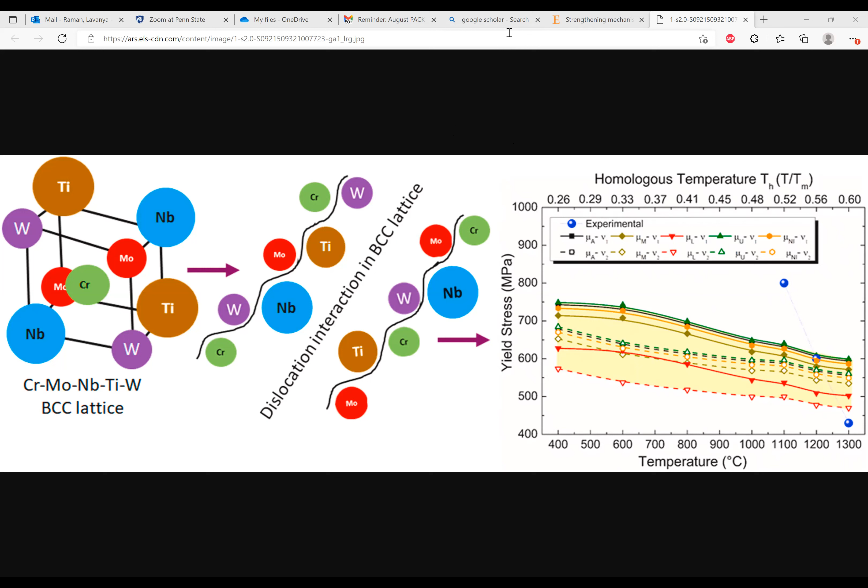Yeah, that's what I wanted to ask. So do you have this available in that paper that you just showed? Yeah, it is there in the manuscript. Thank you for your answer. Thank you.

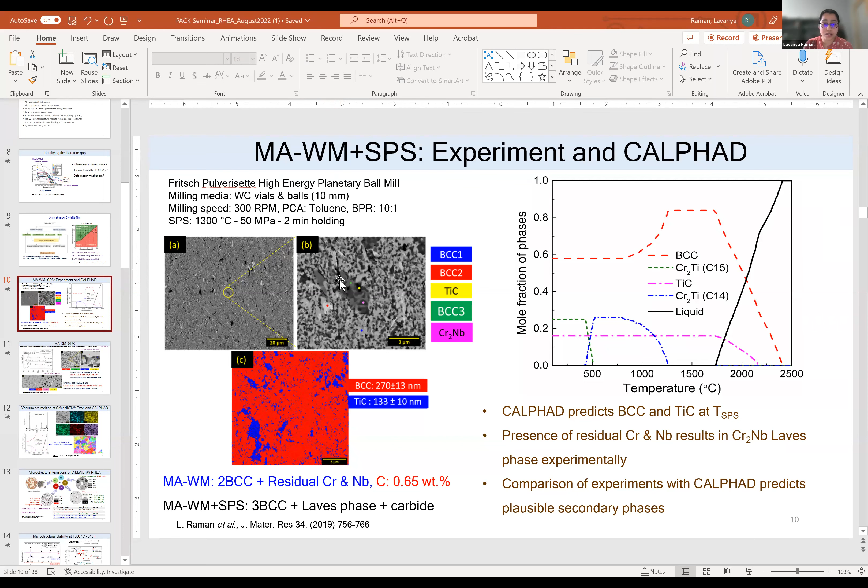Yes, point EDS. So this is the SEM BSE image, where you can see different contrasts, and from these contrasts I can get the composition. BCC1 is the gray matrix which has all the elements. The white region is BCC2, which is tungsten rich. So depending on the composition from EDS analysis, we identify 3 BCC phases. So is BCC1 rich in a major alloying element? No, it has everything. It's just titanium depleted, because titanium goes into a secondary phase as titanium carbide.

And what about BCC3? I know all of them have everything, but there must be some variation. The variation is that BCC3 is slightly moly rich. This is one of the bottlenecks when we do mechanical alloying: we have to compromise between contamination and the extent of alloying. So BCC3 is also titanium rich? What did you say? I missed that. This is moly rich.

And is this present homogeneously throughout? It is homogeneously present. Figure A is the low mag image, where you can see the different phases are homogeneously distributed. Okay. Thank you. Thanks.